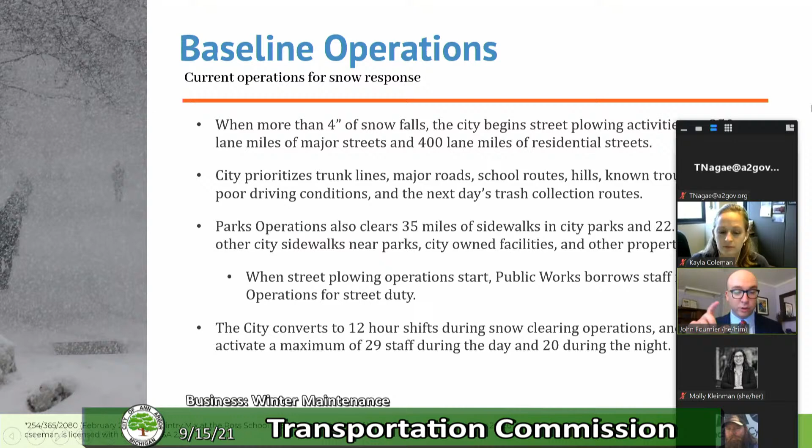That includes staff from parks operations, and sometimes we'll borrow staff from our signs and signals unit as well. But if they weren't street plowing, they'd be doing signs and signals work.

As part of our analysis, the resolution from City Council asked us to divide the city into zones, and we decided to divide the city into 4 zones. First is the downtown or DDA district.

Generally, this sidewalk clearing activity exists downtown already. It's generally provided by the Main Street Biz, the merchant associations, institutional buildings. So if you're a larger apartment building, they generally do a pretty good job of clearing their sidewalks in front of the building. And of course, individual business owners.

Our general impression of downtown clearing is that for the most part, they do a decent job. However, I do say that and you think back immediately to the fatality that occurred downtown, and I think that's worth noting. So we really kept that front and center in our analysis, and we want to talk about ways to improve service downtown and make sure that doesn't happen again.

So for all of the scenarios that we provide, our recommendation downtown is to work essentially within the existing model, work with building owners and with the organizations that are clearing the sidewalk, and help improve the quality of the work that's being done downtown right now.

Again, some parts of downtown have good service, some parts have decent service, but we need to be more actively organizing and working with our partners downtown to make sure that we're getting crosswalks and curb cuts cleared in a timely manner, and making sure that our sidewalks are being cleared in a timely manner. So generally speaking, that's our recommendation for all scenarios downtown.

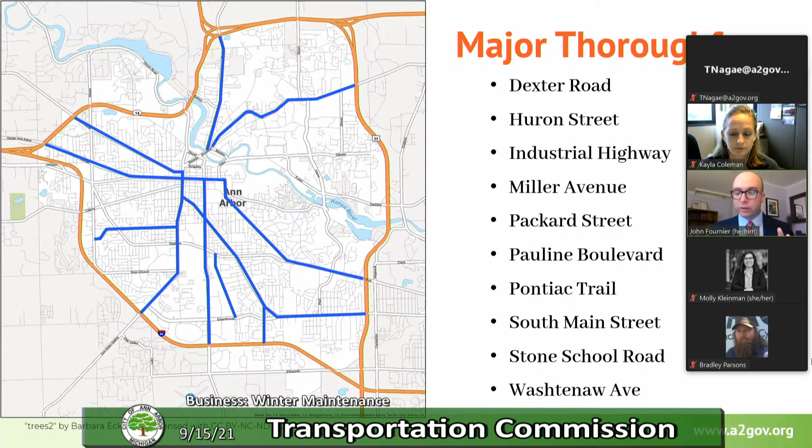For each of the scenarios we present, we've put together 6 different scenarios with common assumptions for all of them. They differ in terms of the ambition of the service, but where we are providing service, the level of service is the same. It'll make sense in a minute.

In each of these 6 scenarios, service starts where the city is providing service. It starts at 1 inch of snow. We model operations to have all covered pedestrian infrastructure cleared within 24 hours after the end of snowfall. We assume 25 such snow events a year.

According to NOAA, Ann Arbor averages about 17 1-inch snow events every year, but it can vary between 10 and 25. So in the interest of making sure that during a heavier snow year our operations would be completely covered and we wouldn't be scraping around for money, we assumed 25 snow events just to make sure we can afford everything.

The model includes costs for labor, equipment acquisition, operations, and maintenance. We've shown costs over a 2-year period because for some of these scenarios we're proposing to use internal labor, which means we need to acquire a lot of equipment, resulting in a pretty big startup cost in year one. So we wanted to show both the year one cost and the year two cost, which would be your annual cost once you've gotten over the startup costs, so you can compare those two numbers to each other.

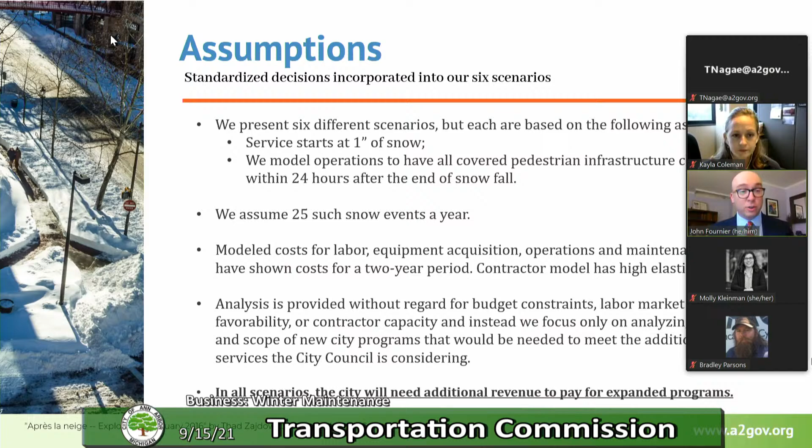Without further ado, let's talk about scenario one. Generally, these scenarios are listed in terms of the least labor intensive or labor cost, and move up from there.

So this would be the cheapest option that the city has that we entertained. This one would involve the city contracting for the labor, so hiring contractors to clear the 47 miles of major streets and 35 miles of parks sidewalks.

We would hire 2 supervisors somewhere in the city, whether that's in community standards, public works, or parks operations, to manage these contractors, to work with downtown stakeholders to improve plowing outcomes in the DDA, and also to support an education and enforcement campaign in the neighborhoods.

So it's very clear that in this model, we are not paying labor directly to plow or shovel or clear sidewalks or pedestrian infrastructure in the residential neighborhoods. We're investing some money in an education and enforcement campaign to try and increase compliance with our plowing ordinance.

There are no capital acquisition costs because we're contracting for all the services, so we don't have to buy additional equipment. But under this model, we do have some concerns about contractor capacity, whether there are enough contractors who would bid to do this work.

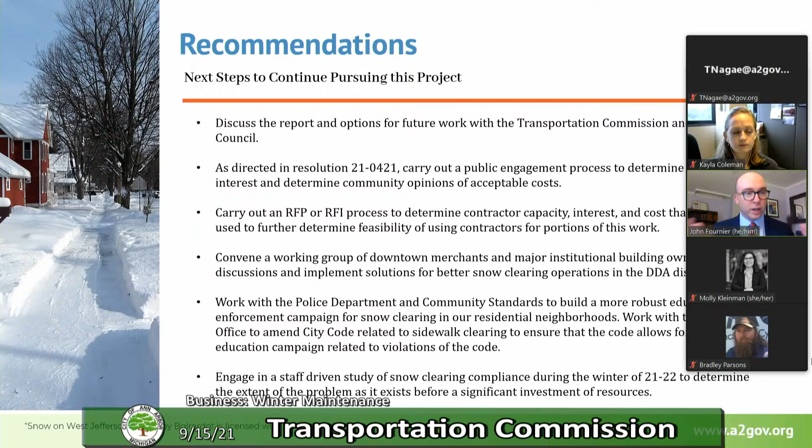So in terms of feedback and next steps, we're going to have a discussion here at the commission, or if you'd like, email me with your feedback after you've had time to read the memo and think about the presentation, I'd ask for feedback before September 24th. Staff will evaluate the feedback, make appropriate edits to the memo and presentation, and then provide those final documents to City Council and share them back with the Transportation Commission.

So, we're happy to receive requests to evaluate different configurations of service. Maybe we do contractors for this or staff for that, or maybe we focus more on an education and outreach campaign rather than a labor-driven campaign. So we can make tweaks and provide some different scenarios, make adjustments to the financial models, or provide more detail on other aspects of the report. We're happy to go back and make those kinds of changes based on your feedback.

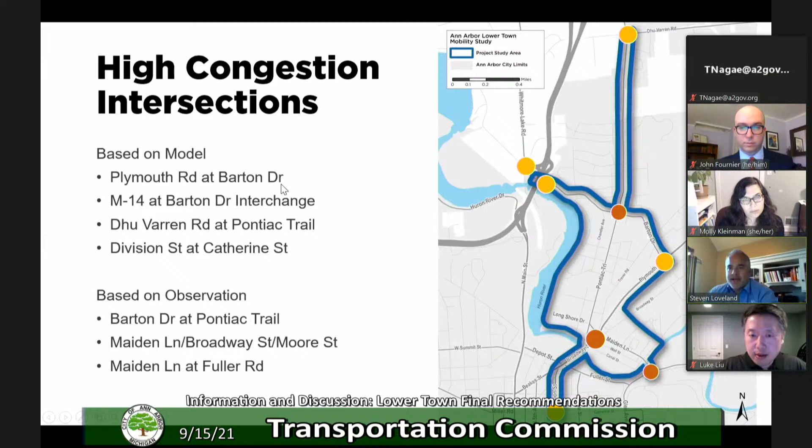So we're here to talk about the alternatives and solutions for the Lower Town Area Mobility Study. Throughout this project we've known there's high congestion areas throughout the Lower Town area. The Lower Town area has Division at the southern end, Broadway, Plymouth, Pontiac Trail, Barton, up to Dhu Varren as our main area. Based on traffic modeling we've done and on observations, these are the areas we know are high congestion intersections. So I'm going to hop right into some of the key locations and what we saw, and what our recommendations are.

So Barton at Pontiac Trail, this has been brought up a number of times. There are delays in the morning heading eastbound from M-14, and delays heading westbound out of the intersection in the evening. There's also on the west leg of the intersection on-street parking that has been brought up as an issue. We looked at a number of different alternatives here, whether it made sense to add east-west left turn lanes, whether it made sense to add an eastbound right turn lane, or if there was a chance to put in a modern roundabout.

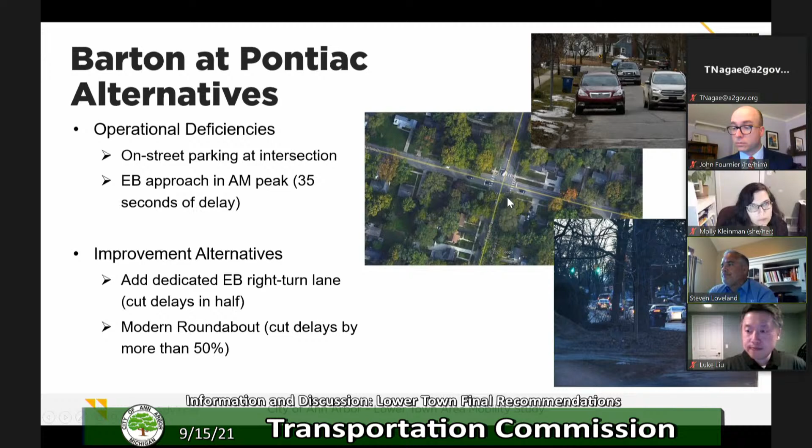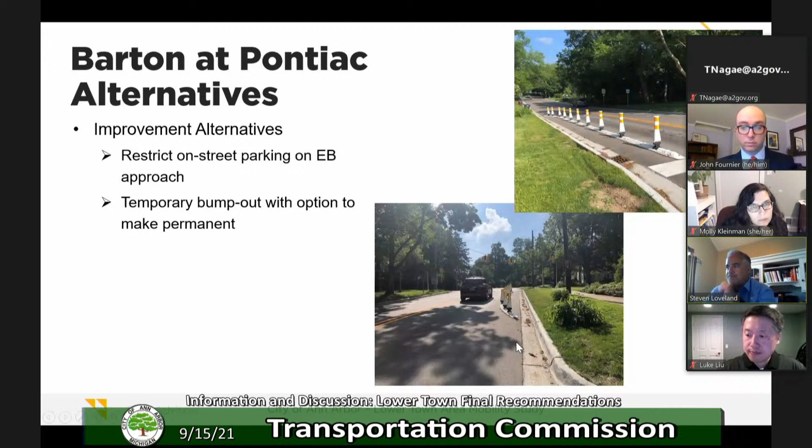Currently out there, and I think it's still out there, there's a temporary bump out, which basically restricts the parking near the intersection. It narrows it down to a single eastbound lane. We do like that, and the simplest recommendation we have right now is to restrict that parking on the west leg, add bike lanes on that west leg, and keep the rest of the intersection as it is, looking for longer term solutions where we can serve pedestrians, bicyclists, and vehicular traffic.

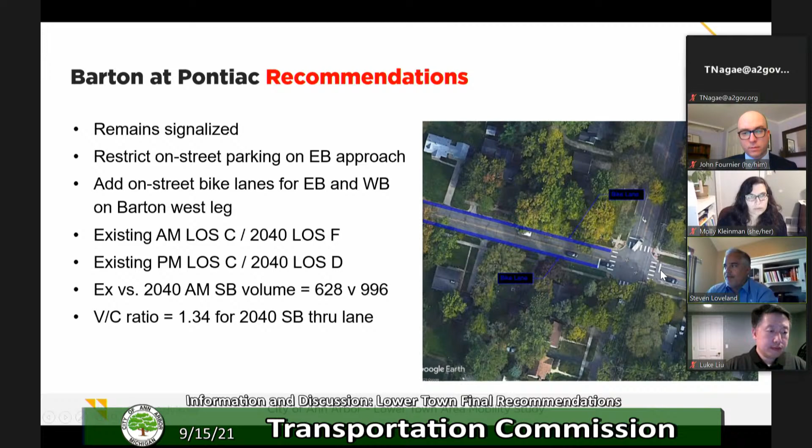We looked at changes we could make to the signal, and the potential again of a mini roundabout. Out into the future there's a lot of new development coming north of this intersection. What we saw with the signal or the roundabout is that there were going to be some operational issues for vehicular traffic. But ultimately the consultant team believes a mini roundabout would be the best option here. I do have to note that the city staff is not on board with this recommendation, but that is what we are looking at for our study.

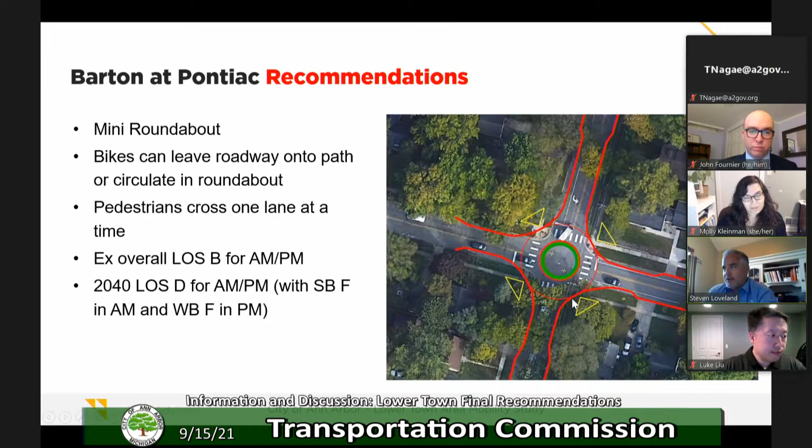The next location we're looking at is the Broadway Beakes Division, a bunch of streets coming together on the southwest end of the Broadway Bridge. In this location, there are a lot of streets, a lot of different movements, which create a lot of conflicts. In addition, Division heads northbound into the intersection with high speeds coming down this hill, and you get a lot of pedestrians through here.

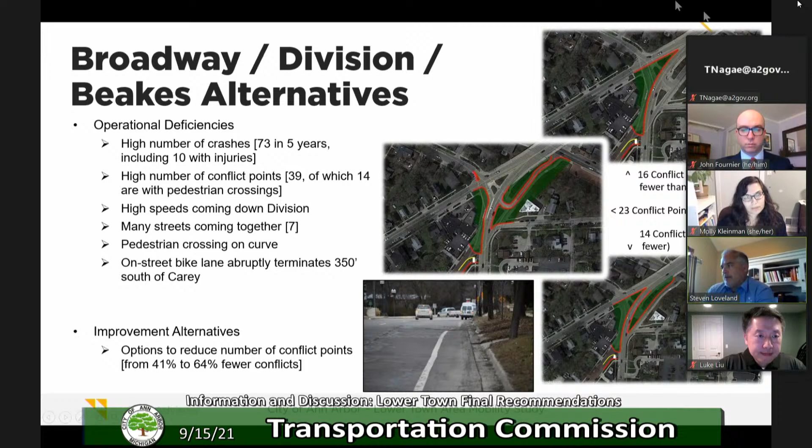So what we looked at is how can we make this intersection safer and reduce the number of conflict points for pedestrians, bikes, and vehicles. We had a few different alternatives that we looked at.

One of the alternatives we've talked a lot about, where we are not going to restrict any of the movements, is just to make improvements for the pedestrians and bikes throughout this area. Currently, when you're coming northbound on Division, the bike lane ends abruptly and the cyclist is required to enter the traveled lane. What we'd like to do with this option is, in blue, continue this bike lane and then provide a buffered area as it gets into the curve section, bringing them up onto the wider pathway across the bridge.

Also in this picture, up on the northwest part, right now as bikes or pedestrians are coming across the bridge, there's no way to get over into the bike lane that's to the west. So we're looking to widen the pathway and make a connection for bikes to get into that.

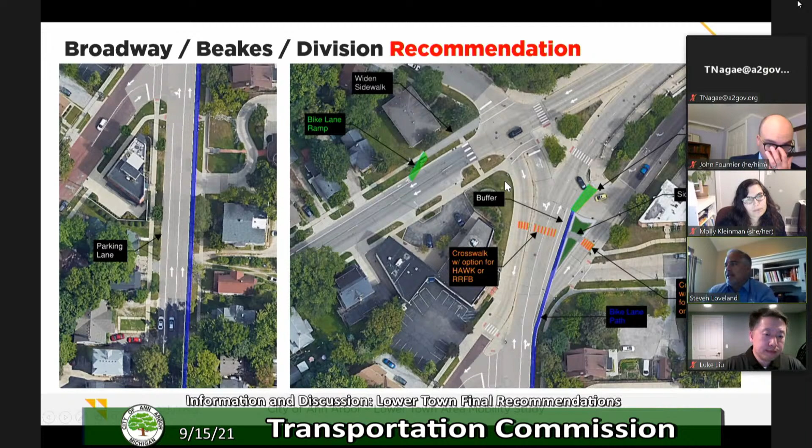The other recommendations look at ways to restrict different movements through the intersection. We didn't come up with a consensus on which movements to get rid of or which roads to close, but there are a lot of options we've looked at in the report. I'm not going to get too deep into that right now, but all of them incorporate improvements for pedestrians and bikes.

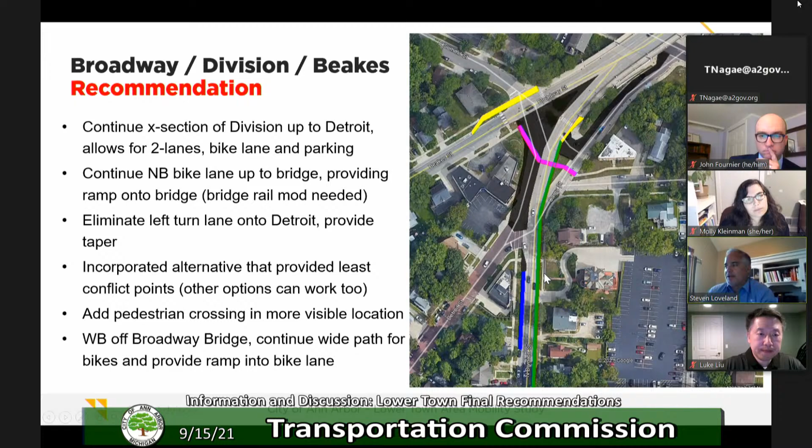The next intersection, Pontiac Trail at Dhu Varren, is the farthest north intersection in our study. Some things to note: you have high speeds coming in from out of town to the north, and we're looking at ways to slow vehicles down coming into the community.

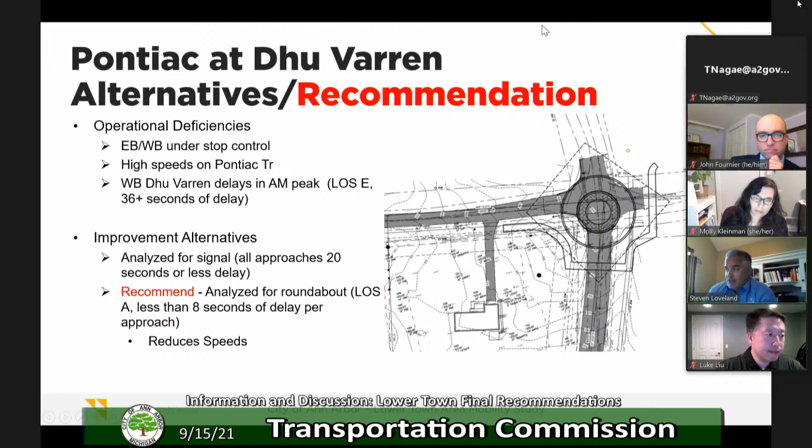Traffic's also picking up in this area due to a lot of new developments, and today it's just stop controlled on Dhu Varren. We looked at it and it does meet a warrant for a traffic signal, and we've also analyzed a roundabout at this location. Both work well, but ultimately we are recommending a roundabout because that will slow traffic down coming from all directions through this intersection.

Barton at the interchange at M-14: we initially started studying this and found there's a lot of traffic. We did a signal warrant analysis and found that it did meet signal warrants.

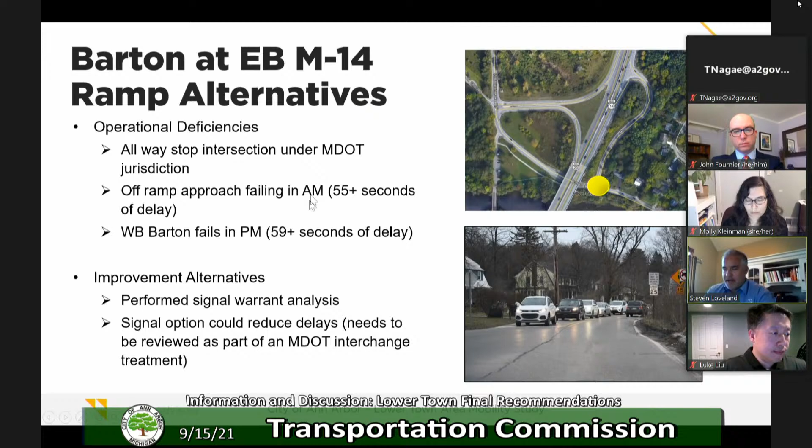But then, as the study was going on, MDOT came out with a study of their own. So we haven't pushed on any recommendations here. We're going to let that MDOT study handle the recommendations in this area.

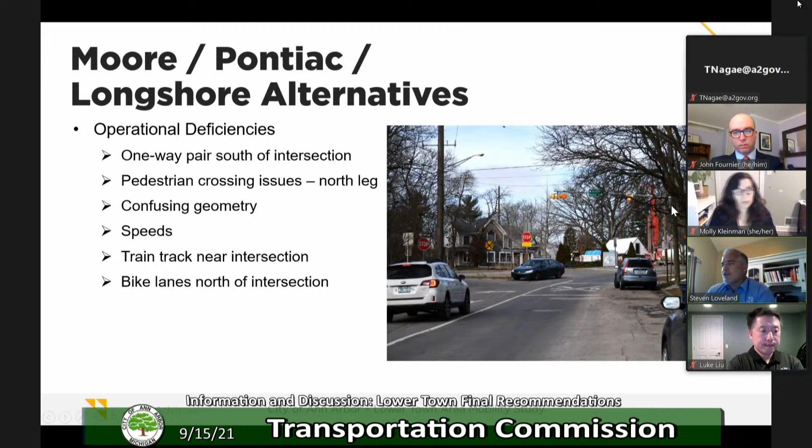Pontiac Trail at Moore, Longshore, and further south you run into Swift. On the southern legs, you have Moore, which is a northbound one-way, and Pontiac Trail heads southbound one-way, eventually turning into Swift. Longshore comes off to the west. This is a non-conventional intersection, a little bit confusing, and there are gaps in the pedestrian and bike facilities in the area. So we were looking at different alternatives to simplify this intersection.

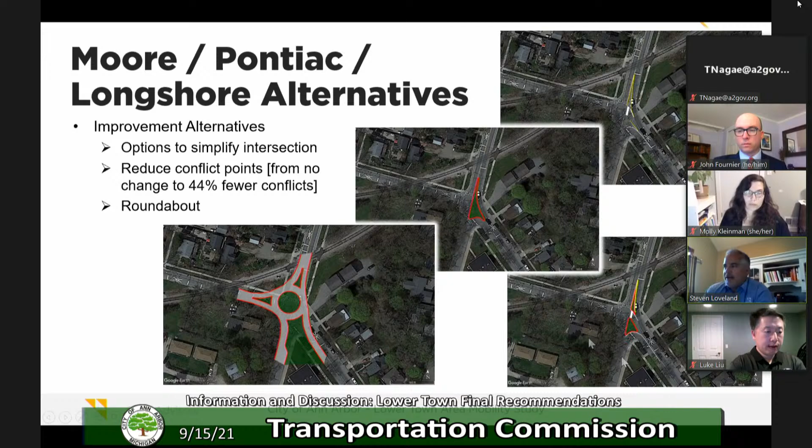We went from very simple options, just looking at pavement markings, to putting in some new islands, eliminating movements, and also looking at a roundabout option here.

An option that came up later in the study was to accommodate bikes and pedestrians in this area. We're looking to yield northbound Moore traffic for all directions, add a bike lane along that section of Moore with a buffer through the intersection, and tie it into the existing bike lanes already on Pontiac Trail. The little green dots are some bollards or delineators to separate the bike lane from traffic.

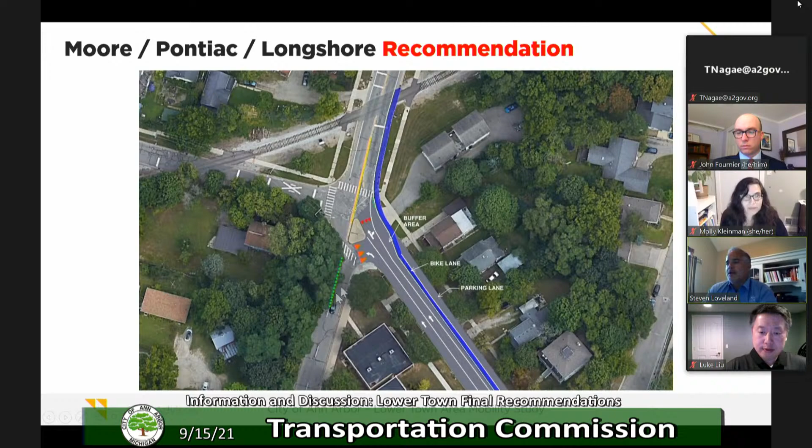Our ultimate recommendation here, which we think could serve best for cyclists, pedestrians, and vehicles, is a roundabout.

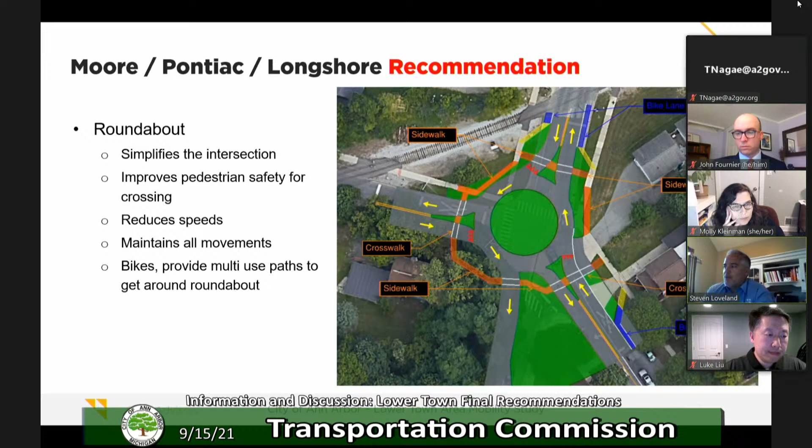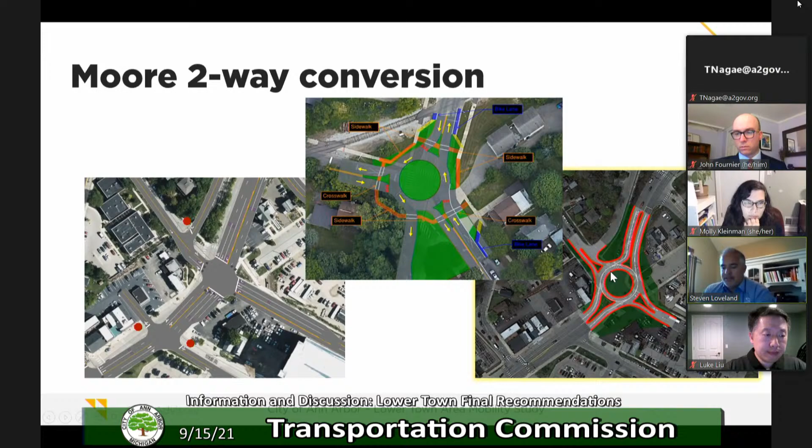Also in this, Moore is shown as a two-way road, so we've analyzed it both under existing conditions, which is one-way, and as a two-way. The bottom left picture shows our traffic model image where we looked at turning it into a two-way road to see how it operates with the signal that's there, versus the roundabout you just saw. The bottom right shows a roundabout at the Maiden Pontiac, or Maiden Broadway Plymouth Moore intersection. We'll get into that in a minute.

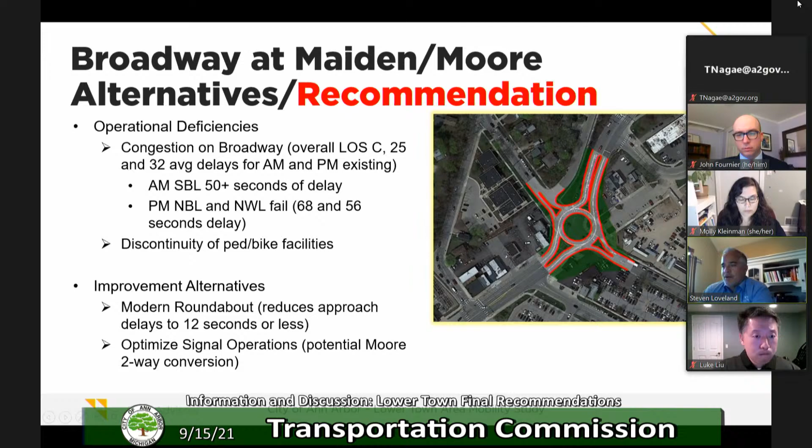This is a busy intersection with a lot of traffic. We've looked at different ways to modify the signal timing to move traffic through. With the traffic we collected back in 2019, the intersection was showing to operate pretty well in our traffic models, but as we go out into the future, it gets worse. We looked at both a roundabout, which in this situation would be a two-lane roundabout, while all the others I've spoken of so far would just be single lane. But we also looked at different ways to time the signal, because a two-lane roundabout's not always desired, so we've also looked at the signalized alternative here.

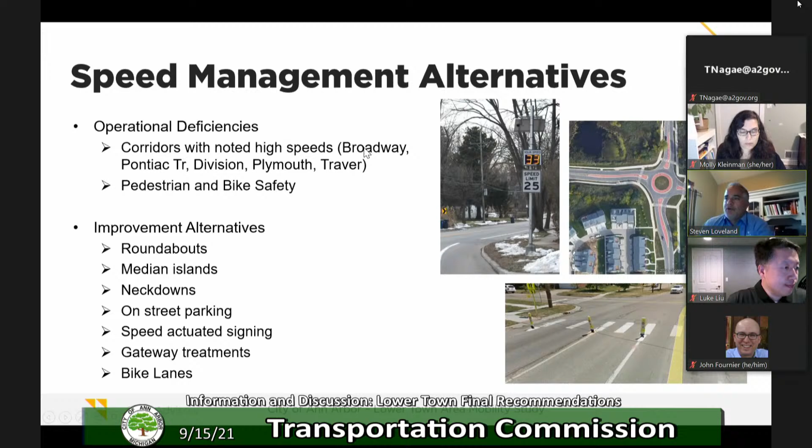Speed management has been a big focus of the study. It serves all modes of travel, but it best serves bikes and peds to make getting around safer. The noted corridors with high speeds are Broadway, Pontiac Trail, Division, and Plymouth. We've also talked about Traver because there's a school in that area. I'll get into some of these improvement alternatives.

Speed management recommendations on Pontiac Trail: we just hit on a bunch of locations where we recommended roundabouts. Roundabouts are good because they make all the traffic entering the intersection come down slow. If we went to mini roundabouts, they may even have to go slower than the roundabouts you've seen. This allows drivers to slow down and see the pedestrians, while bicyclists can either get into the traveled lane or get off onto a wider pathway.

There are radar speed signs out on Pontiac Trail now. We've proposed some new or additional locations. Ann Arbor uses gateway treatments, as you can see in the bottom right picture, and we have some additional locations where we're recommending those.

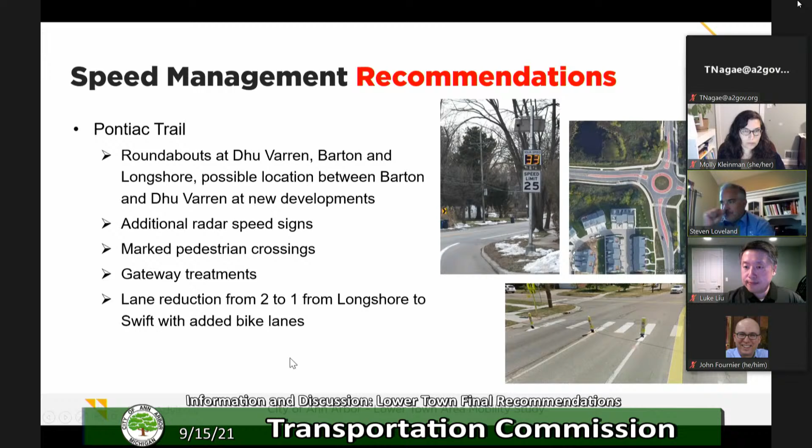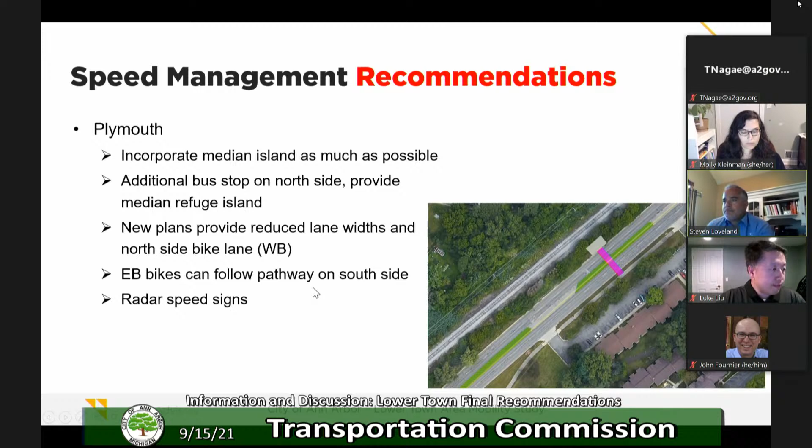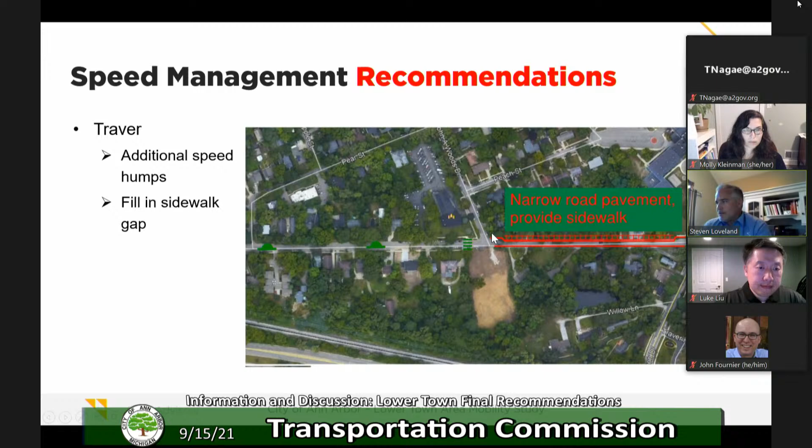On Traver today there are some speed humps. We noted some additional areas where we could add more. Down near the school, there's a stretch of Traver with no sidewalk on either side, so we looked at ways to get a sidewalk or pathway in this area. One option discussed a number of times is possibly narrowing the road in this stretch, which would remove parking on at least one side, and using that extra space to put in a walkway. That way you wouldn't have to tear up people's yards to build new sidewalk, since the grades aren't the best in that area.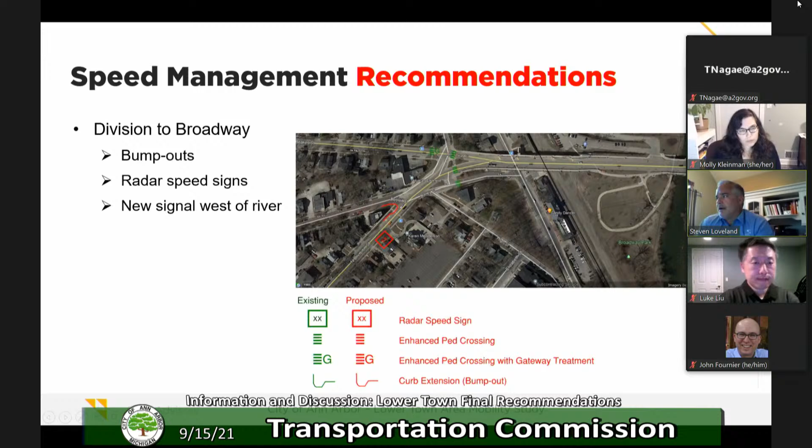At Division and Broadway, we looked at adding bump outs, which give the feel of narrow lanes and slows down traffic. We're also adding radar speed signs as you're coming up Division into the busy intersection area, and another radar speed sign as you're coming southwest across the bridge.

Pedestrian recommendations: we've looked at where we could add rectangular rapid flashing beacons, high emphasis crossings, ramp upgrades, countdown signal heads, and install pedestrian warning signs. This map shows some of the areas we identified through all the different studies we did on the project.

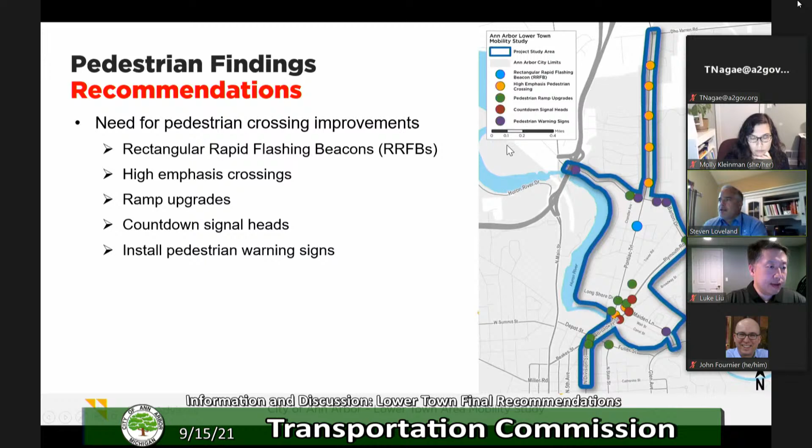We had warning signs, also noted gaps in sidewalk throughout the area and where we could potentially fill in sidewalk gaps. Some of this has been filled in since we created the exhibit. Other pedestrian improvements include street trees, increased green belt, lighting, school improvements, and speed management.

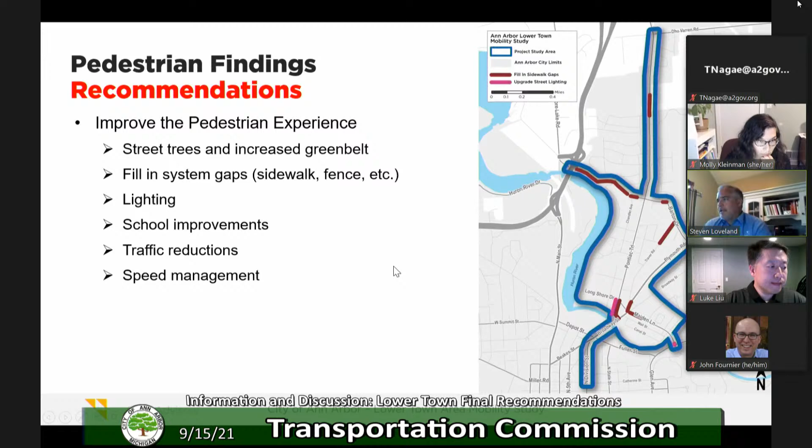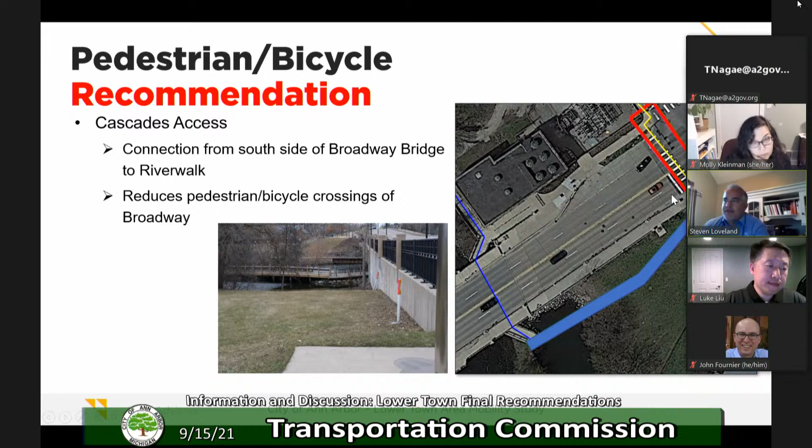One specific recommendation is Cascades access from the south side of Broadway, looking to build a ramp down to the water, taking pedestrians under the street instead of crossing them at grade, and then they could go up to the Cascades.

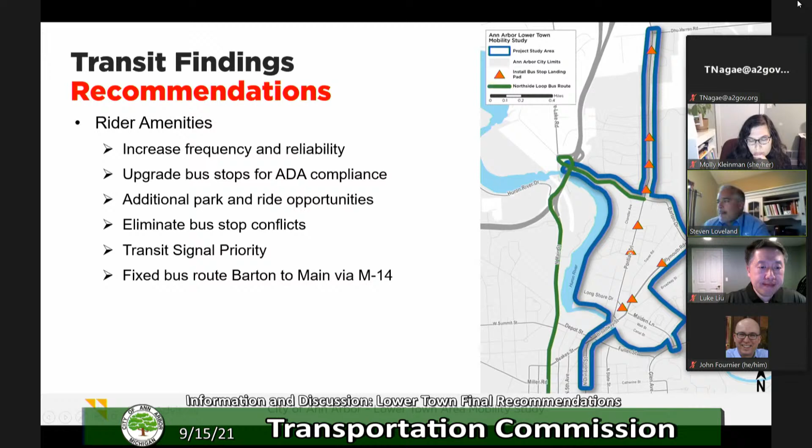Transit recommendations: this exhibit shows a potential new bus route along Barton that would hop onto M14 and then get you down onto Main Street. That's currently lacking for the Lower Town area. Some other thoughts on transit include increased frequency and reliability. There are a number of locations to upgrade bus stops for ADA compliance, and we should look to park and ride opportunities.

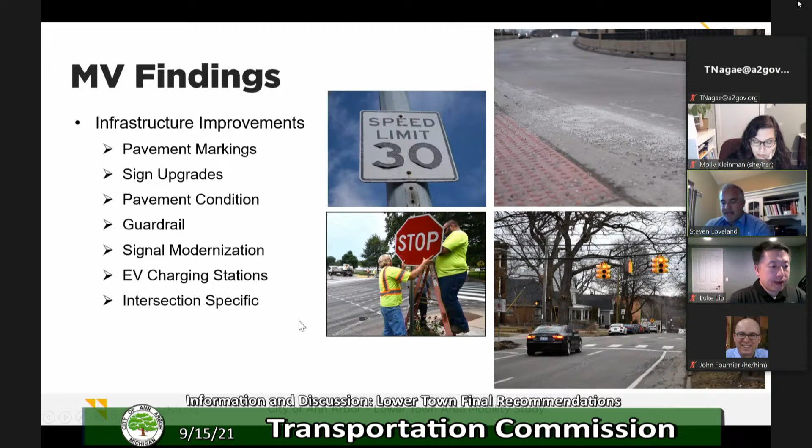Some stuff for motor vehicles: a lot of this came out through our road safety audit, just improving pavement markings, specific sign upgrades, guardrail that might need fixed, EV charging stations. A lot of different things came out through all the steps in the study. Also driver technologies, changeable message signs, speed management and warning systems, and then transportation system management and demand management.

Some of the ways you can do transportation demand and system management: by improving the non-motorized facilities, you're going to get more people who will walk or bike rather than use their vehicles. Improve the transit, ride sharing programs, flexible work times, and we've also shown some park and ride lots where we could add additional park and ride lots potentially.

And that is a lot of slides and hopefully a short amount of time. So I'm open to questions.

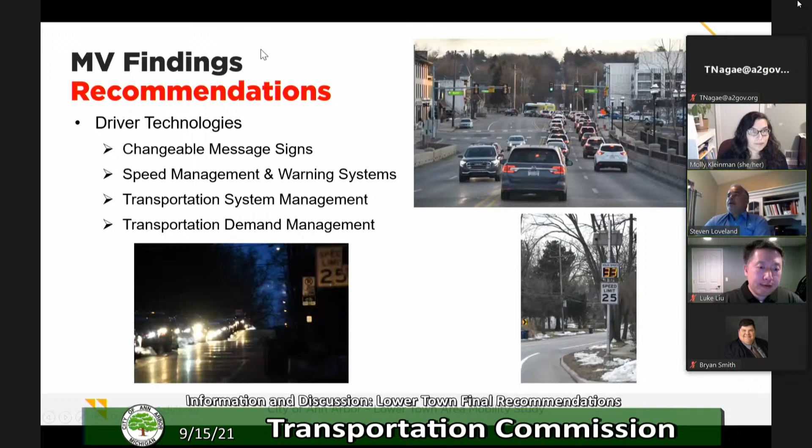Commissioner Hadamaki: Thank you. I just wanted to register some concern about the proposed roundabout at Barton and Pontiac, given its location right next to the STEAM school, and just the common belief that roundabouts handling pedestrians, especially younger kids, raises some red flags for me. It's just a block or two away from the school, and we'll get a lot of school pedestrian, little kid traffic on a rush hour kind of thoroughfare. So just registering concern. I'm not saying it's impossible to make it happen safely, but that's a known difficulty with roundabouts. I'm not sure if you guys had put thought into that already, or have designed solutions to make parents feel better about sending their kids across lanes—maybe a little island 2 or 3 feet where you're playing Frogger to get across and then hop across again. I'm not sure if you guys have put any thought into that particular location of a roundabout.

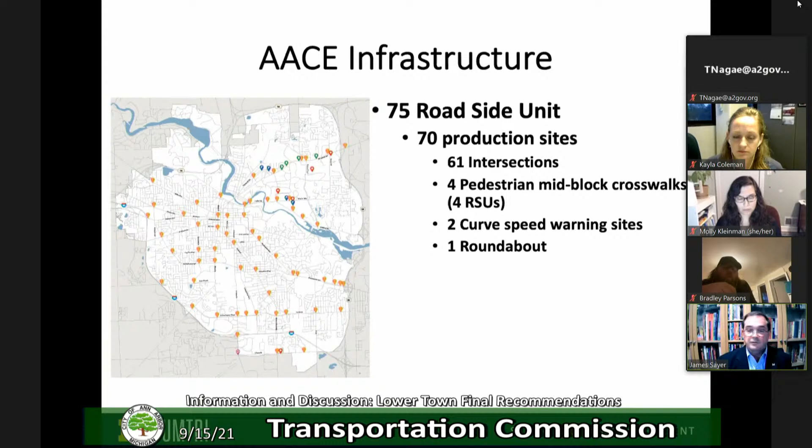What we have today in the connected environment in terms of infrastructure is 75 roadside units. 70 of these are located essentially at intersections, pedestrian crosswalks, 2 curve speed warning sites, and 1 roundabout. These roadside units collect information from vehicles broadcasting wireless signals, and they also broadcast out signals of their own, such as the signal phase and timing of the traffic signal, and the fact that a pedestrian has pressed the button on a rapid flashing beacon.

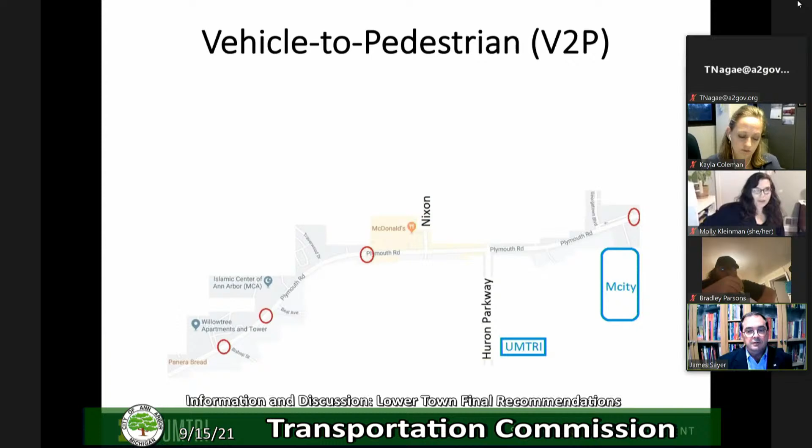One of the studies we completed recently looked at 4 crosswalks along Plymouth Road, specifically looking at what effect we might have on the likelihood of a vehicle slowing down if they received a warning inside their vehicle, rather than just relying on them visually seeing the beacon or the hawk signal.

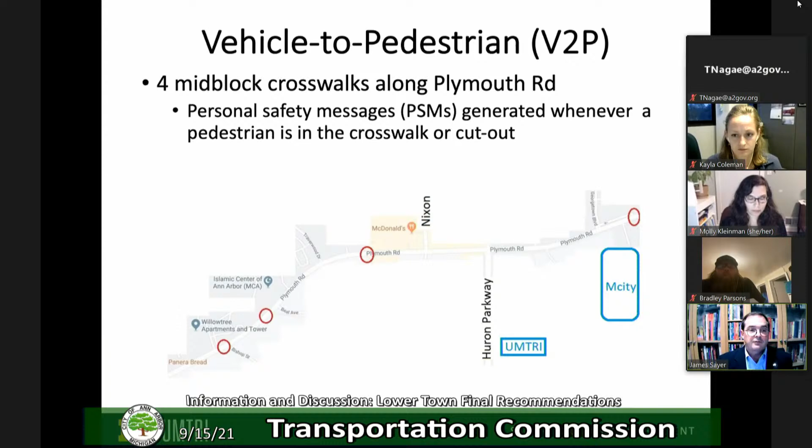So as mentioned, 4 mid-block crosswalks. We were broadcasting wireless signals called personal safety messages whenever the crosswalk button was pressed. Here's an example of one located on Plymouth Road, close to the fire station on North Campus.

I will say that one of the things we struggled with when this data was being collected in 2020 was that there weren't a lot of pedestrians out walking around. In fact, traffic in general was probably down, although the city would have a better sense of that than I would.

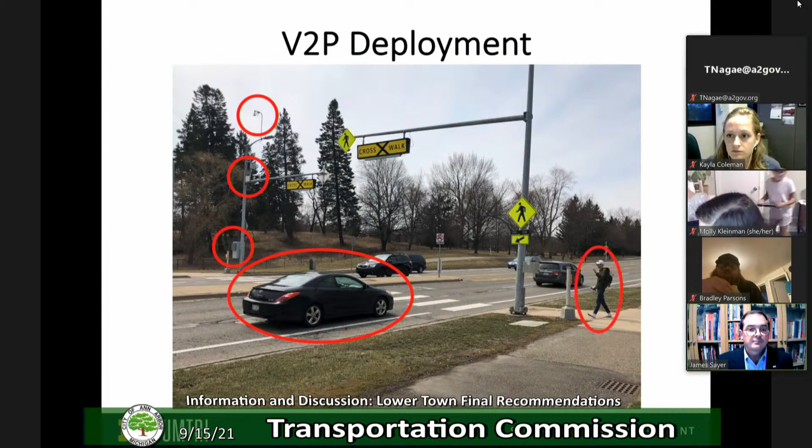So quickly, some of the findings: we investigated the accuracy and limitations of this pedestrian detection system. It employed a pretty coarse image-based detection. We found it was pretty effective when settings were properly tuned, but it took a lot of fine tuning.

We also looked at the actual driver behavior of people who had our equipped vehicles, and we saw that drivers were stopping at crosswalks sooner. It wasn't a significant effect, but it was nevertheless safer, in the direction we would like to see.

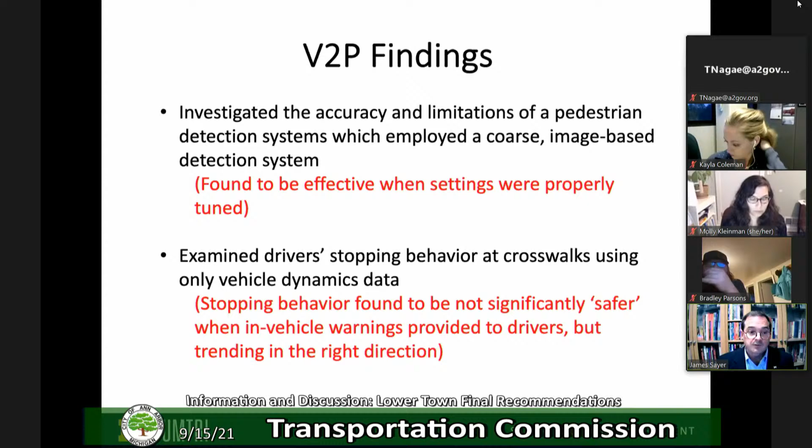Part of this is quite frankly due to the sample size, given the issues we had with COVID. We weren't getting the pedestrians crossing Plymouth Road from apartment complexes, for example on the north side, going to North Campus, that we would have under normal circumstances, or even expect to see today. But again, the results are in the correct direction.

We also have a roundabout project taking place on the south side of town, down by Costco, at State and Ellsworth. This has actually been a problematic roundabout for crashes—it's the 14th worst intersection in the state. It's complicated relative to most roundabouts in that it's 2 lanes.

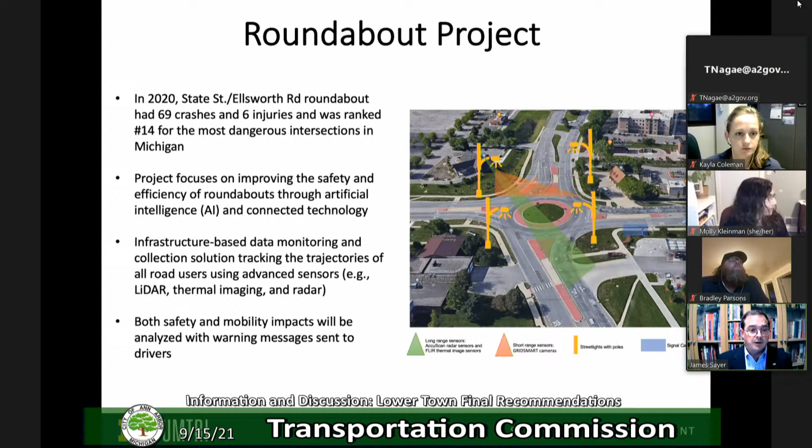So what we're really focusing on in this roundabout is collecting data and trying to figure out how these conflicts are being generated. We're doing a lot of different infrastructure-based sensing, as well as prediction of where vehicles will be heading. We're also looking at detecting and predicting the paths of pedestrians and bicyclists at this location.

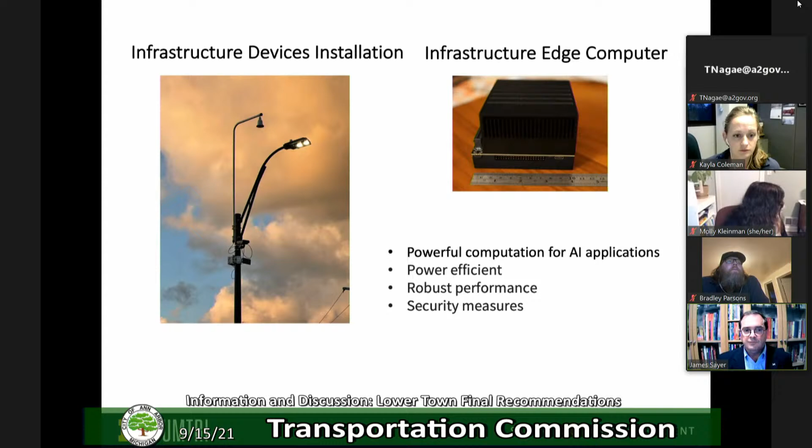Again, in the photo on the left, you'll see there's another GridSmart system up there. Below that are radar and LiDAR based systems. We're doing a lot of powerful computation at the intersection, with equipment again housed in the traffic control cabinet. Right now what we've seen is pretty robust performance, and we really don't have any security concerns in terms of interfering with the city's network.

If I can get this to run, I will be able to show you. Oh boy, all right, there's a video, and oh, here we go.

This gives you an example of a thermal image, rather than a standard video image, and we're able to track vehicles as they operate in the roundabout. Taking this kind of information and developing predictive algorithms, we can better understand where conflicts are occurring. We don't have a lot of pedestrian and bicycle data for this intersection, simply because what we've seen thus far is just not a lot of that kind of traffic.

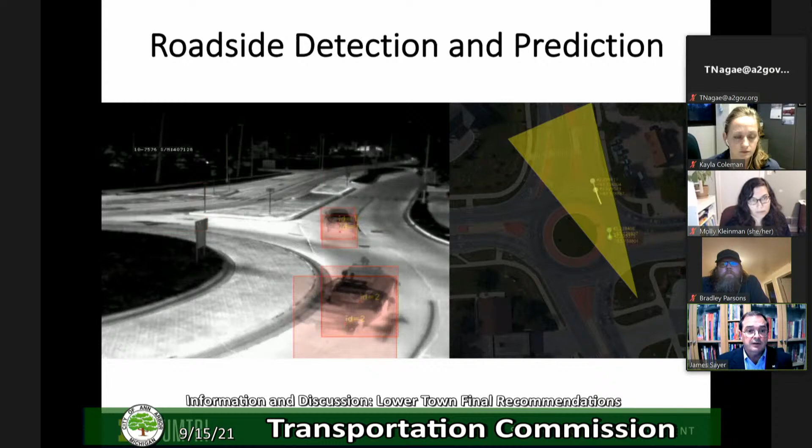I mentioned earlier the final project starting this fall, the Smart Intersections project. We're deploying smart intersections with a lot of the same equipment I showed for the roundabout: radar, LiDAR, thermal imaging, as well as conventional off-the-shelf products like a GridSmart camera. Here again, we'll be doing wireless communication between vehicles and infrastructure, at 21 intersections, broadcasting proxy basic safety messages.

So even if there is a vehicle that doesn't have wireless equipment on it, the image processing can detect vehicles and will generate a pseudo message to represent that vehicle. What that does is, instead of having 2 or 3% of vehicles equipped in the environment, it creates a situation where all of the vehicles are equipped. And it's not just the vehicles, it's also the pedestrians and bicyclists. This is a significant advancement from what we've been doing for the better part of the last 10 years.